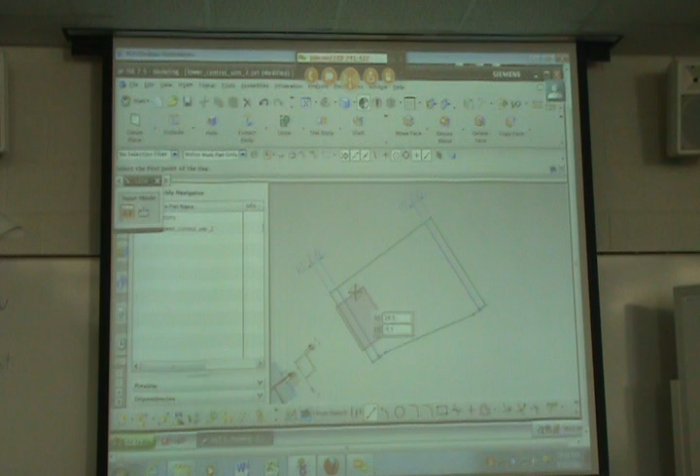And then, yeah, I might as well make a box in the middle like I did before. So if I make a line here, yes?

Their team wants to hear on Skype. They're all logged in right now. They're following you right now, but they can't hear anything. Okay, if you don't mind using that right now, that'd be awesome.

Give me a sec. Thanks, let's just pray this works. And they already added me as a contact, right? I think so, they were on last time with you. Okay.

Who are they? Nico, Leone, and X. They said they figured it out, they're listening to you some other way. Through the Tandberg? Yeah, I think so. Okay, so that sounds good. I guess I'm just going to hold up.

Are there any questions up to this point, what we're doing? Jeff? If we all go in on separate computers and create new parts and then do all the geometry waving, it doesn't show up right now, but later, is it going to have a problem with us all trying to save it, or how are we supposed to do that?

I didn't understand everything you said, but this might be an answer to you. It would be best to have one person open the assembly and then create the parts. And then you can edit the parts separately.

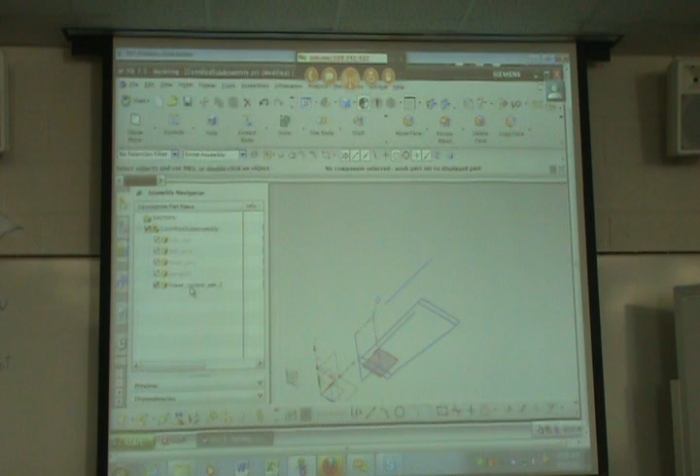But if I'm in this work mode, then the best thing to do is say File, Save Work Part Only. So now, since the work part is the part, not the assembly, it's only going to save that part.

So yeah, be real careful so you don't overwrite someone else's assembly. But basically, once you get all the geometry waved down, everyone could just work in their individual parts, and then one person, once you have it all saved and you put it back up into the assembly, it should just modify all of them, right?

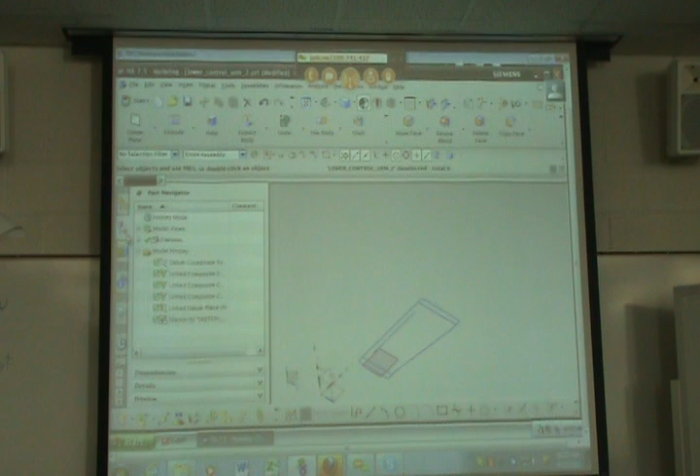Any other questions up to now? Okay, so I'm just going to keep working on, actually I'll just do it here, this sketch here.

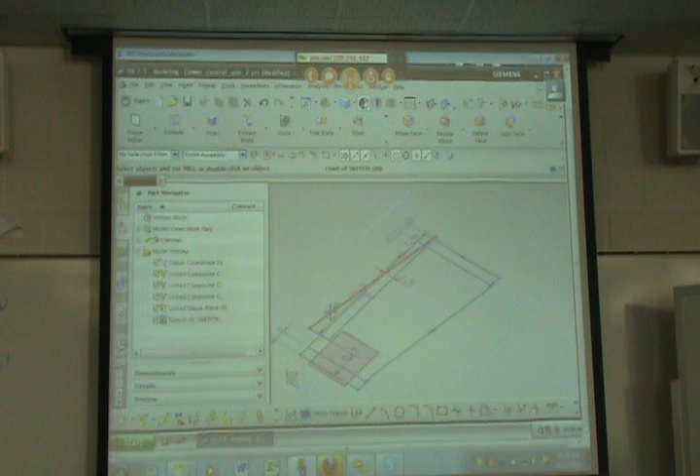Hello, can you hear me? Hello? That's creepy. Hello? Okay, we're going to skip this part for now. Jody, can you help me out? Hello? Hello, can you hear me? Okay, great. So yeah, I'm gonna keep going, all right? And so you can hear.

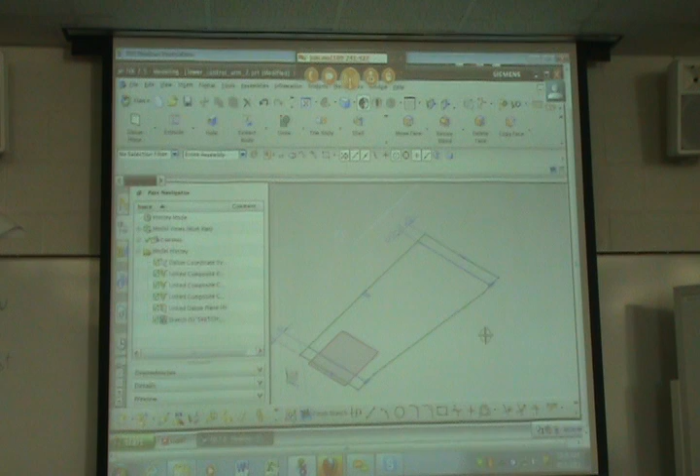Okay, forget that, we're just gonna not do the middle. So here I have my sketch. Finish the sketch, and then I'll just extrude this. Symmetric value, let's do this to like 5.

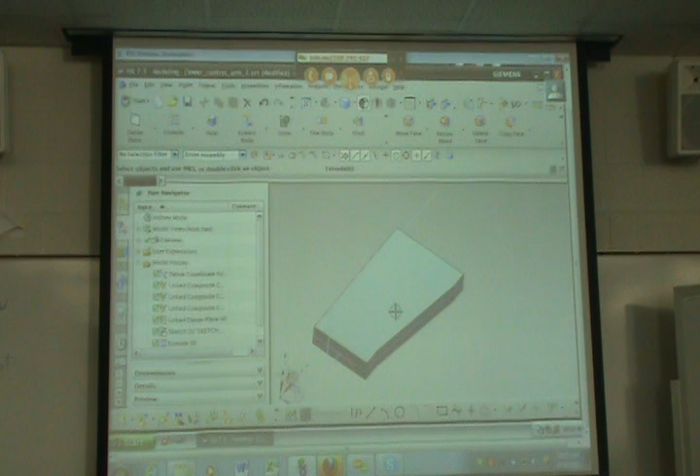Okay, so here I have a block now, right? And as you can see, if I go back to my assembly and change the expressions, like width 2, which is this back one there, so I change this to 32, then the entire geometry updates because the sketch was constrained to the assembly to the wave down line. So when the line changes in the assembly, the wave down line changes, and then the sketch will therefore change, and the geometry will change. Does that make sense? Okay.

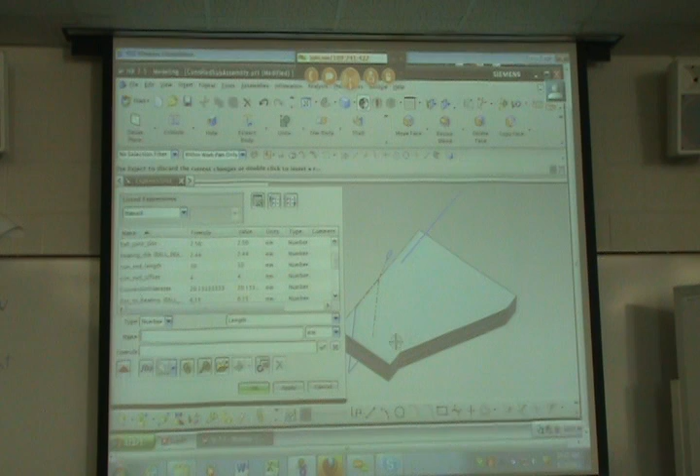So there's one more thing I want to show you guys, and then I'll just have you go, and we'll be able to answer any individual questions.

If I'm in, so not only can you wave down geometry, but you can also wave down parameters. So if I go, now this is the work part, right? That piece. So if I go to expression, I don't have any parameters in this work part. However, I can pull one down from the assembly, and so if it ever changes in the assembly, it'll change here. So that's a similar button.

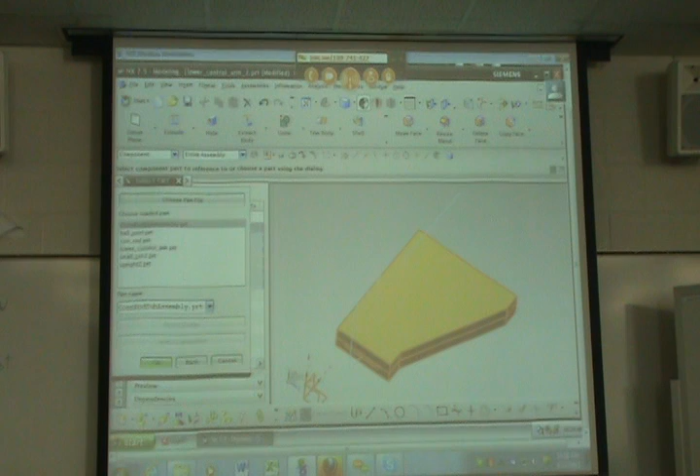Remember the chain? So here's another one, inter part reference. So if you click on this, it'll bring up a list of which parts you want to pull it from. So usually you're going to do your assembly. Okay, and then it now has a list of all these parameters, all these expressions that are in the assembly. So if I want to pull down, well, length, the line is already constrained to length, but if I wanted to pull this down directly, I just hit OK, and then here's this showing the file path.

I think Dr. Jensen even talks about this and mentions how to do this in the lecture. And you can name it yourself, so I'm going to name this length. Apply. So now I have my own called length, but it is constrained to a higher thing. So if I ever want to make something and constrain it to that parameter, a parameter that exists at a higher level in the assembly, you just wave down the parameter and then link your geometry, your sketch, or whatever to that expression or parameter, and then if it ever changes up top at the assembly level, it'll also change down below.

Okay, does anyone have a question with that?

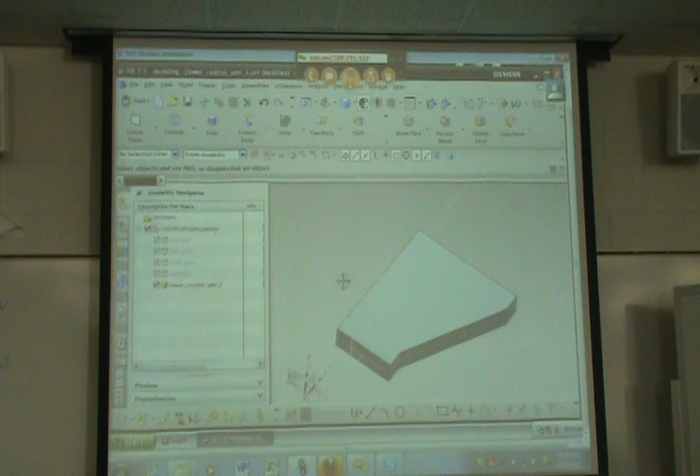All right, so in your groups, just break out, decide who's gonna make what part, and then just kind of go for it. It's not real strict, there's no real measurements of what to do or how big to make it. Just make it so it looks pretty similar to what the drawing is, and that's pretty much good. Remember, the point of this is learning and practicing waving down geometry, parameters, expressions, so that you can make this robust. All right?

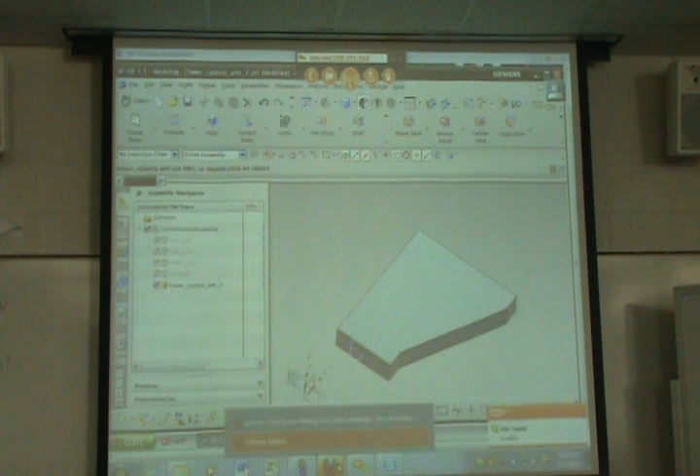Are we gonna do like one main assembly and then sub assemblies?